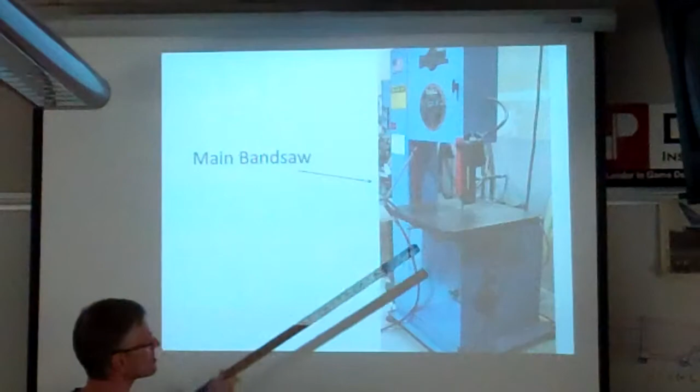So just like any of these saws, when you're lining up your work you want to make sure that your hands aren't in the way of that blade, right? They don't go into the big sharp blade. So you're always going... I mean, obviously, if there's the blade, you're not going to put your thumbs out there like that and get them chopped off or anything. You always make sure that you're 3 inches away from that blade when you're cutting. And you put what do they call it, a gate piece? A fence?

Okay, so some of the interesting parts you can see from here: here's the blade, here's the guard, which you're going to label on our test. Guys, look up back there, not time to talk right now.

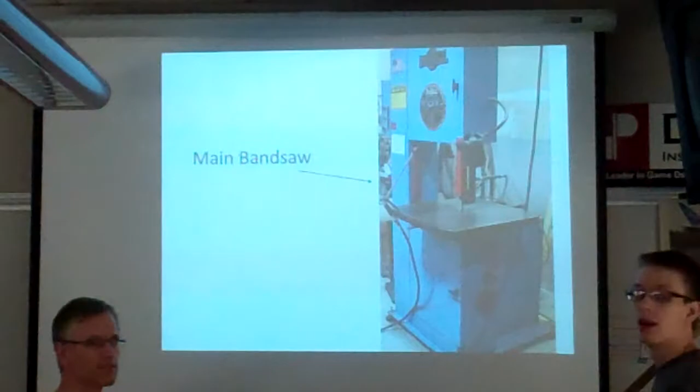So this is the blade. This up here, here's the guard. It is the guard that was originally mentioned in the general safety.

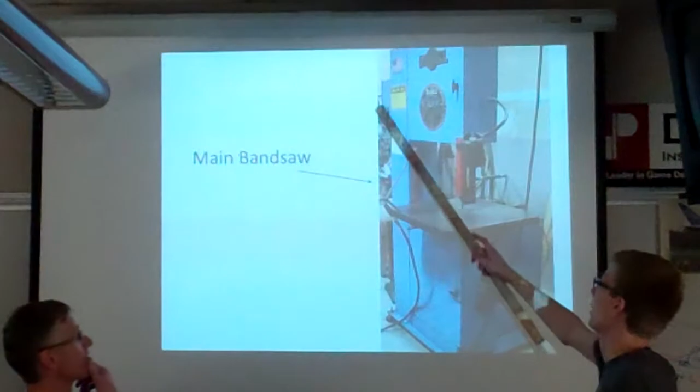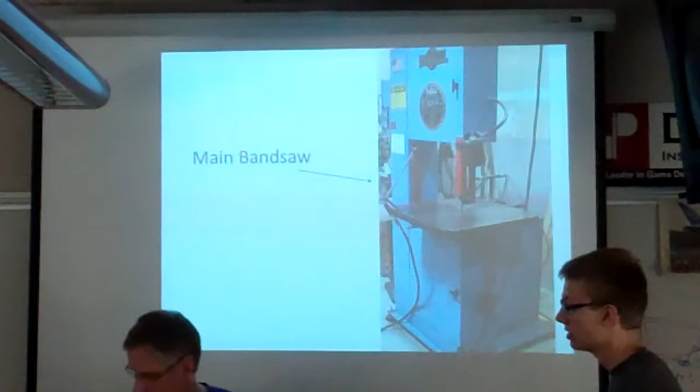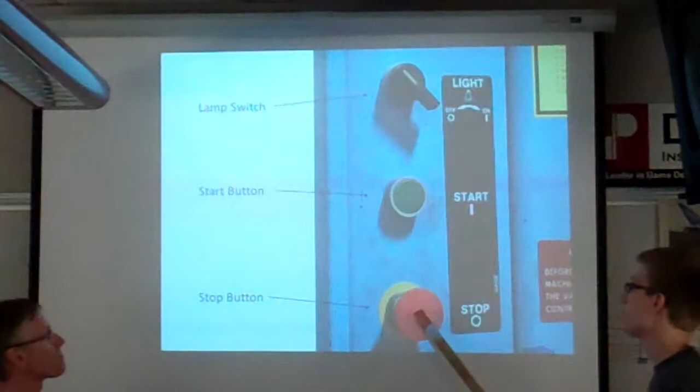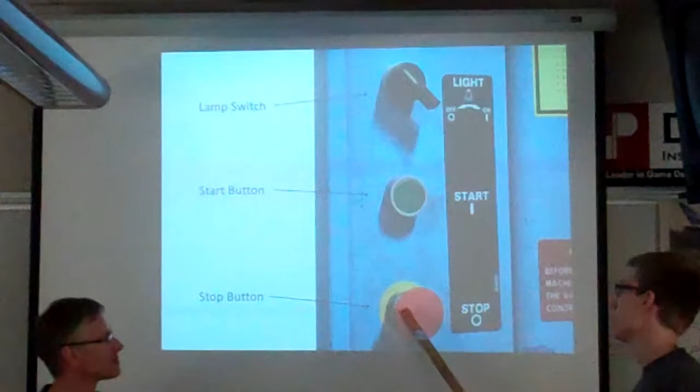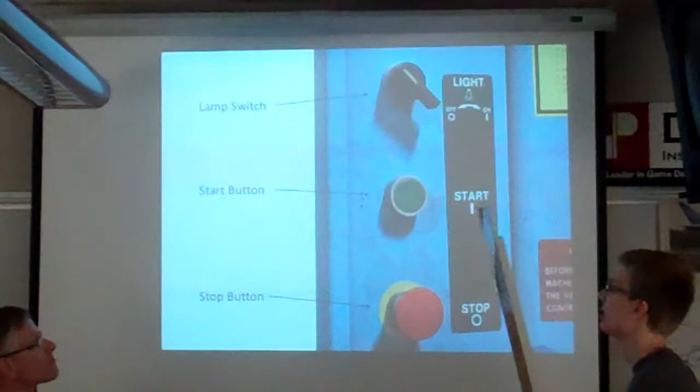So this is a zoom in on those buttons. Here's the stop button, here's the start button. This stop button is really easy to press. The start button is harder to press because it's recessed with a big metal ring around it to make it so it's harder to accidentally turn it on, because the repercussions of accidentally turning it on are significantly higher than the repercussions of accidentally turning it off. And this is a light.

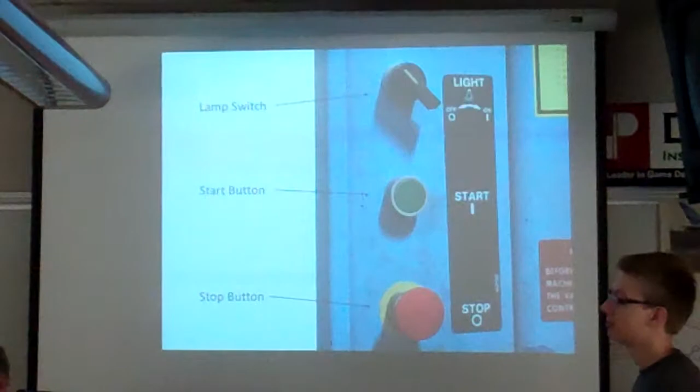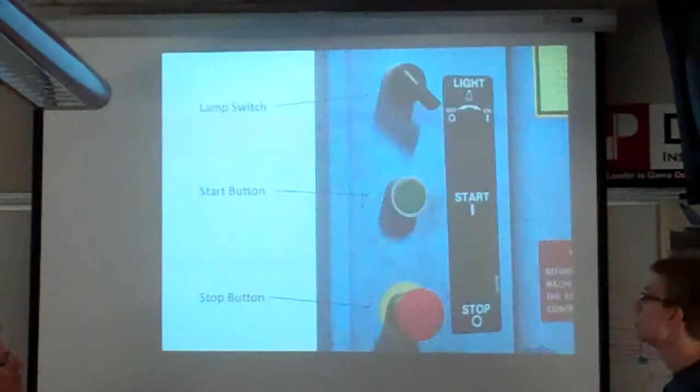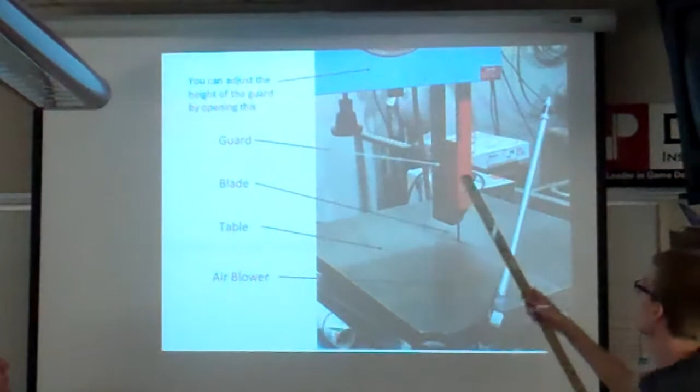Here's the air blower, here's the table, here's the blade - it's sharp. Here's the guard - it's not sharp. It guides the blade and helps it so it doesn't get all bent out and breakable.

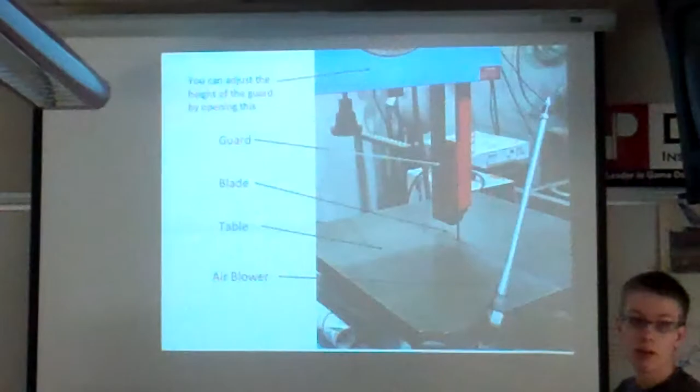What's the air blower for? Huh, what's the air blower for? It's to remove flecks of aluminum or other kinds of metal.

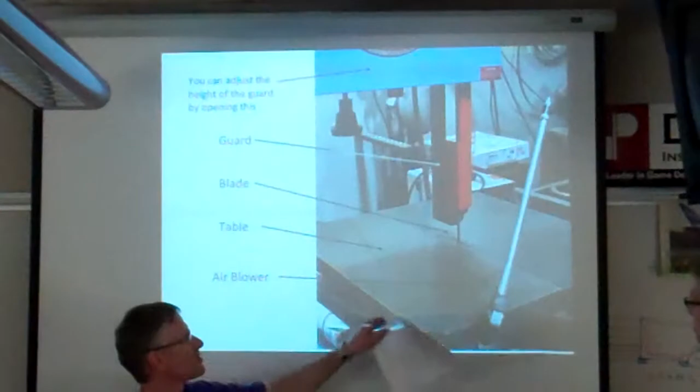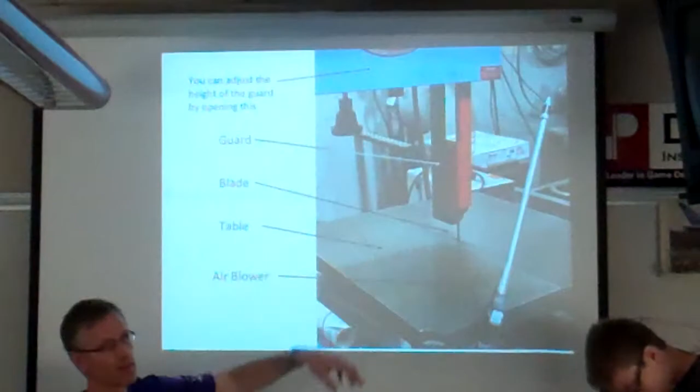Next. So what you can do is like the compressed air thing - it's just compressed air, usually shop air. What you do is after you get cut, there's bits of material all around the blade and stuff, so what you do is you can blow it back and away. And then what we do when we're done with the day is we go behind and sweep all the little bits and stuff that blow back there. It's just to kind of keep it clean, so you can see what you're doing when you come with your next piece of metal to cut.

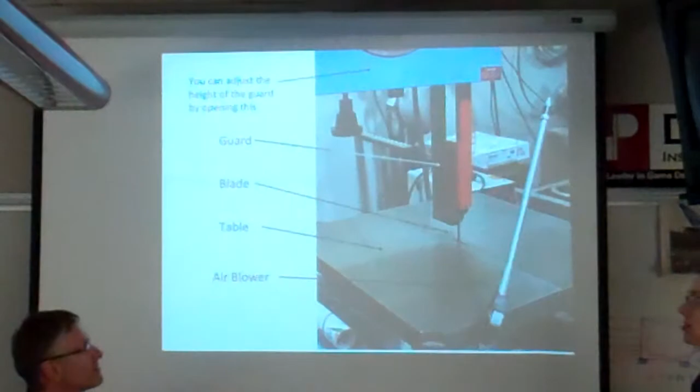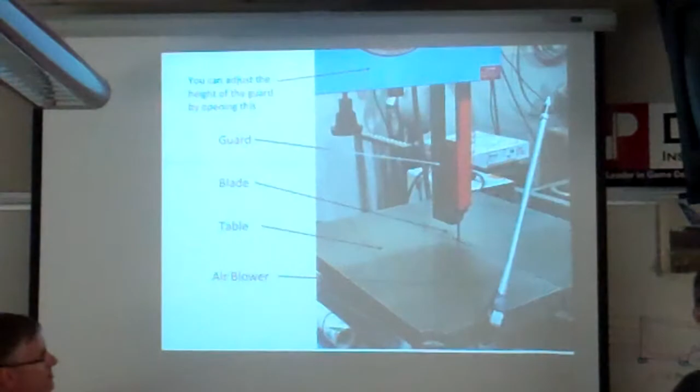Also, if all else fails, if you can't do it any other way and it's heating up too much, you can actually just continuously blow on the thing and cool it down. And if flecks are flying in your face, you can also have someone else blow it so it doesn't go in your face. Yeah, hit next.

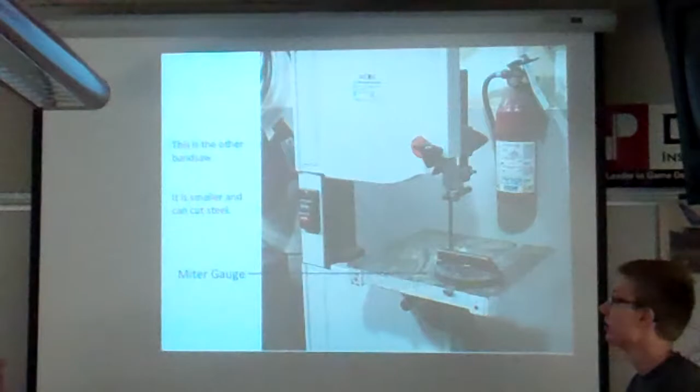Here's the other bandsaw we use. It is smaller, and it's made for cutting steel.

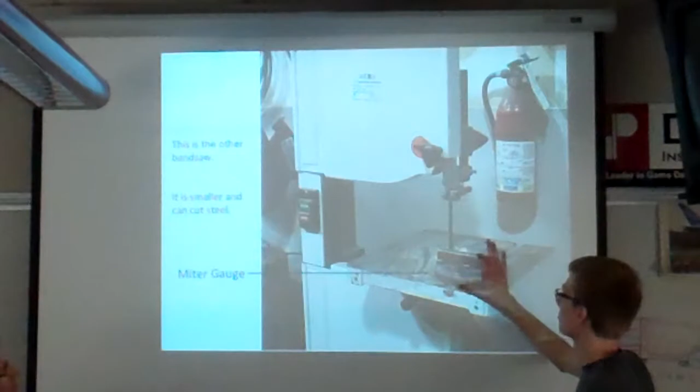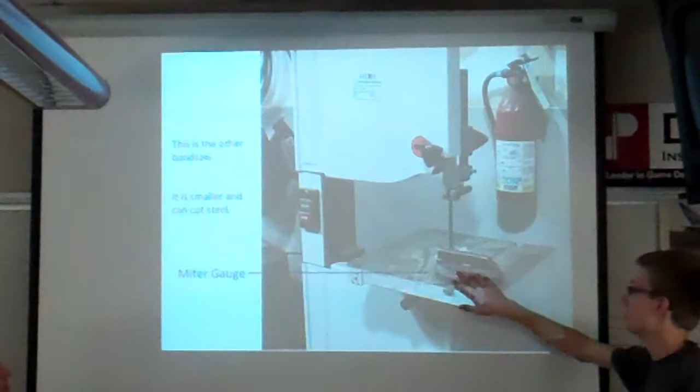This is a miter gauge. It basically allows you to cut at an angle. You put your metal in the miter gauge groove—it's like a little flat surface. You push your metal up against it, and you can twist this knob to adjust the angle, so you can have an angle on your cut.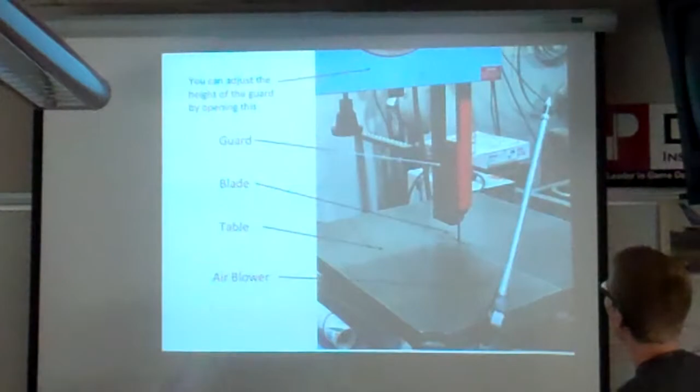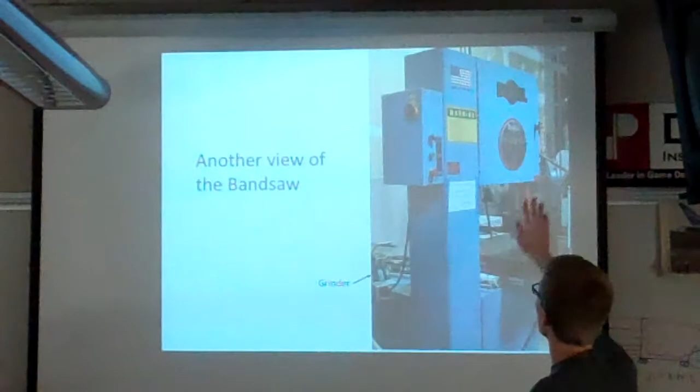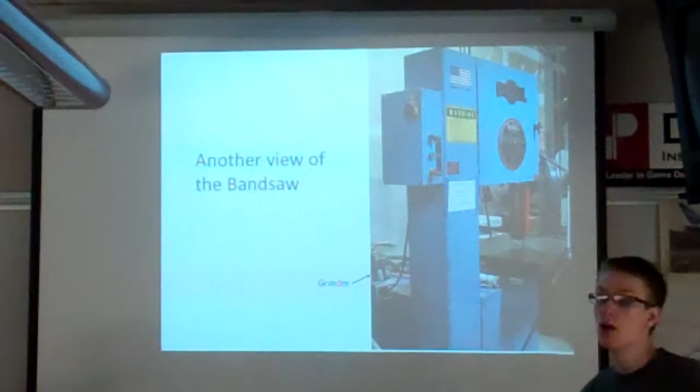Most of the time the guard's in a place that's good enough—it's normally pretty low. You want it about an inch over the metal, so if you're cutting a piece, you want it about an inch over. If it's an inch and a half, it's fine, just around an inch. Not like 6 inches, because that'd be ridiculous. It's probably pretty intuitive though.

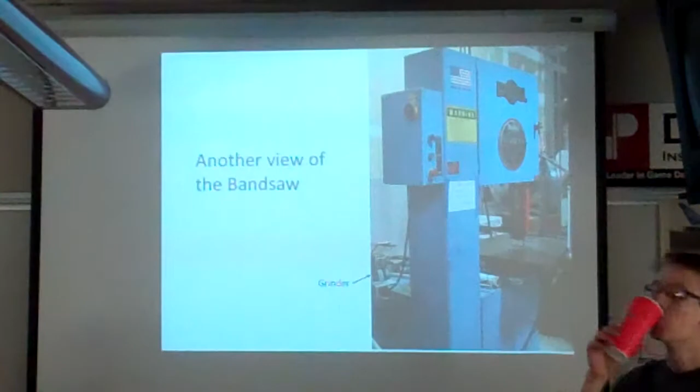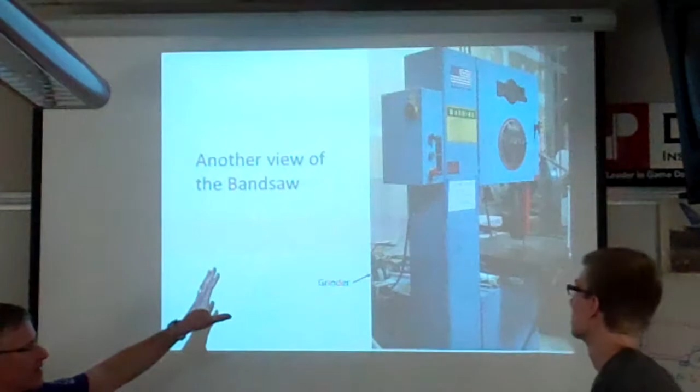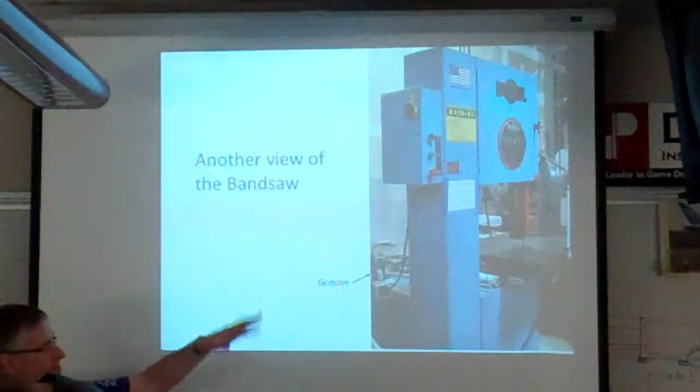Whenever you make any adjustments to the machinery, you always wait and make sure it's off, make sure nothing's spinning. That's true for anything—if you're going to grab something behind the blade, just make sure the blade is completely stopped. It does take a little while to stop because it's got so much momentum when it's spinning, since it's a big giant piece of steel. It's a huge temptation to just grab it, but just don't.

It's also hot for a few seconds after, and sharp. Hot and sharp are not a good combo, ever.

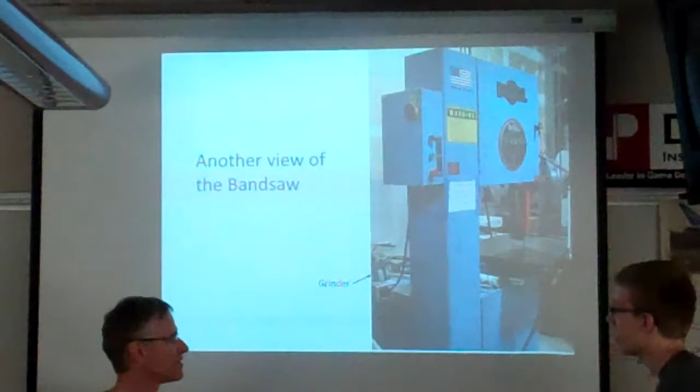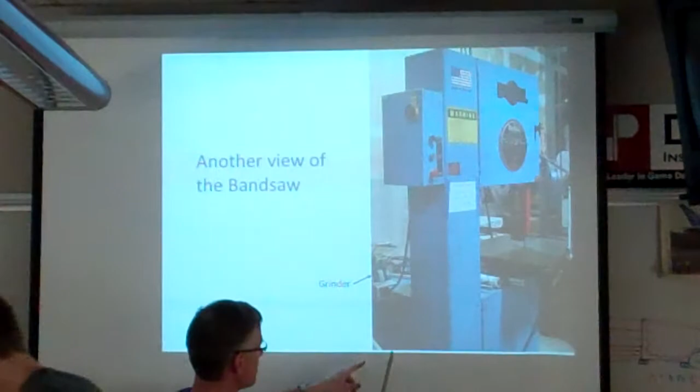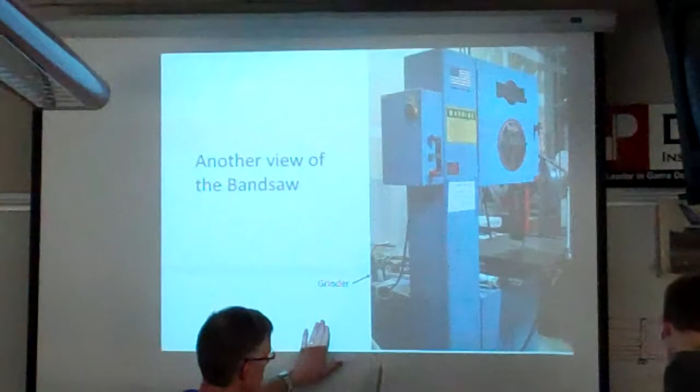Another thing you should probably do, if you've got a small piece of work and you want to cut off just a little bit off the end: you hold the work like this, and you use a push stick to move it along on the side closest to the blade. Because if it's less than 3 inches, it's going to be pretty small pushing it through on the right hand side. So use a push stick or another piece of metal to guide it along, so you don't risk your fingers—fingers are fun to have.

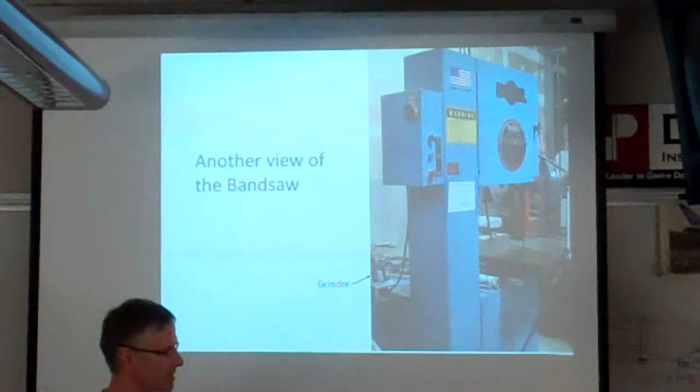If you can't find something to push it with, talk to a mentor—there are pieces of scrap wood around that are really good for that.

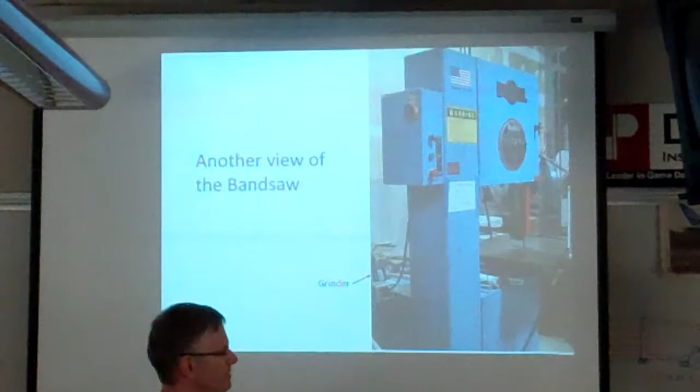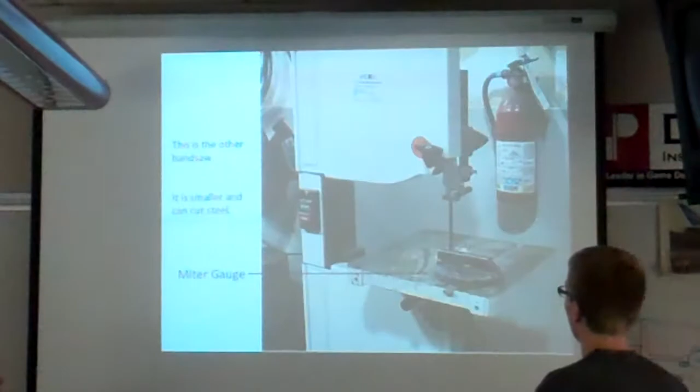What else we got? Go to the pro tips—it's after the steel page. Pro tips: you should watch your fingers.

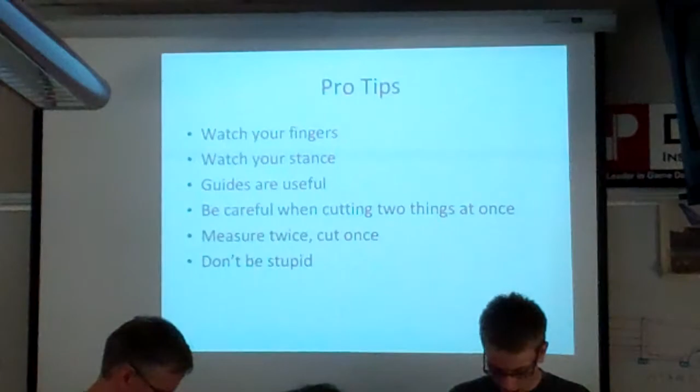Also watch your stance—I discovered this yesterday, I didn't get the same kind of training other people did. When you're milling, you don't want to lean on the piece, because when it goes through, you'll pitch forward into the blade. Tyler, your feet are actually supposed to be like this—one in front of the other, perpendicular, so you're purposely not going to be able to put your full weight there. This goes like this, and then you go like that, so your legs are solid and it's kind of impossible to just go forward.

So we'll get to some stance here. We didn't cover that one. The idea is you don't fall forward. Basically, make it so you don't fall forward and you can't fall forward.

Another thing to notice is having a fence. Actually I could probably do this with this and that big metal plate I can't find. Okay, so let's say this is your plate, your table. You hold the table 'cause that's heavy, and it's hard to do that.

So let's say I wanted to make a cut, and here's your blade here-ish. You could take your clamp and clamp this onto it, then run your piece along this thing to make sure it goes straight. Generally you want it the same distance from the edges, so it's a nice straight line that's perpendicular to the edges.

So that way, if you have a cut on a piece of wood that's completely parallel, you can use that technique for a really nice straight line. Otherwise, if you're just trying to follow a line with the bandsaw, it's really hard - it likes to jump around. Although if you're just eyeballing something, and it's completely unprecise, you don't need it. Normally there's a steel bar nearby the bandsaw for that purpose.

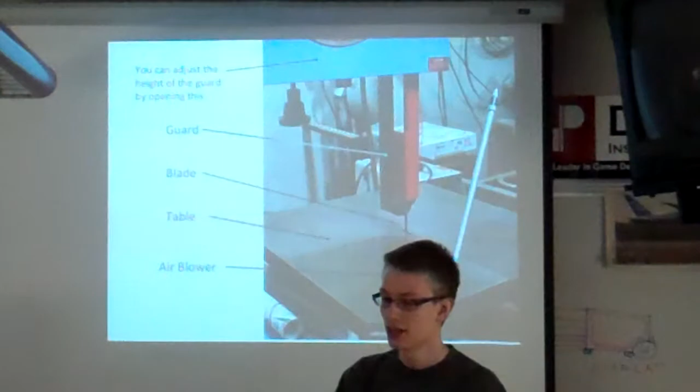If you're cutting a piece of metal and it gets really hot, you probably shouldn't use a rag to hold it, because the rag might catch the blade. That's what somebody was doing with the rag. Or you can just go a bit slower and let it cool down some. If it's getting really hot, that's bad.

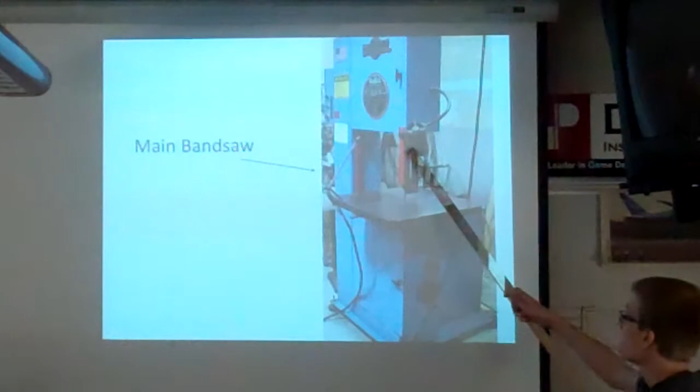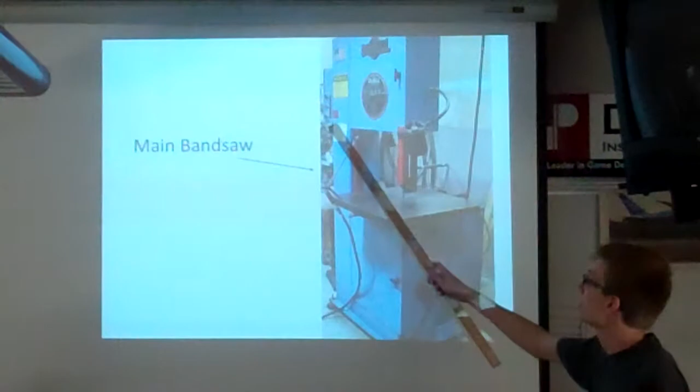Okay, what is this? Guard. What is that? Blade. What is this? Table. What's this one? Off, on, light, lamp. Is there anything else? Air blower, the belts inside. Belt cover.

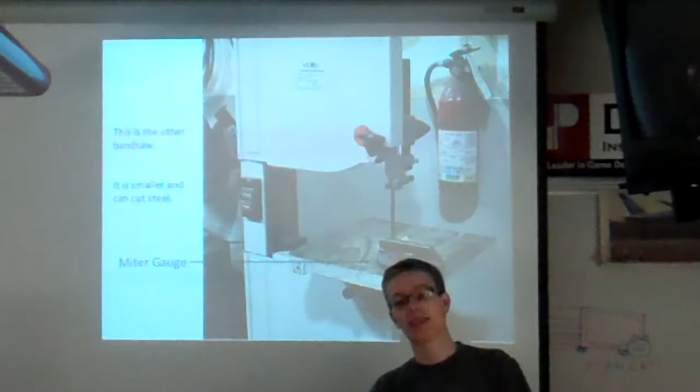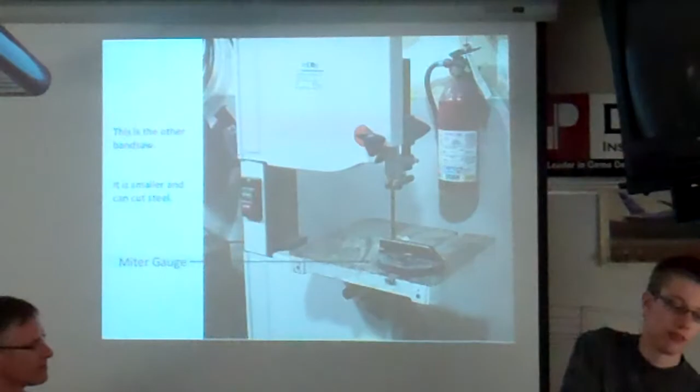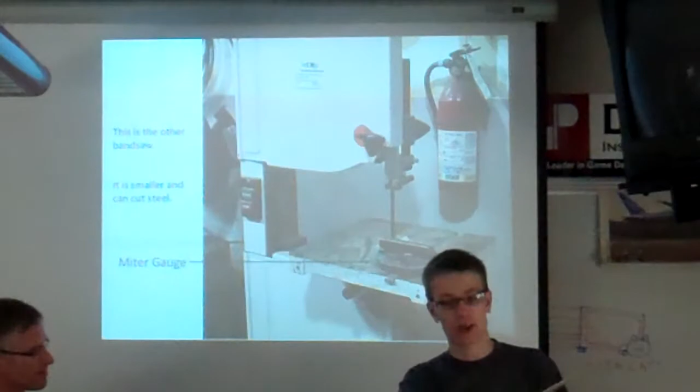Some of the bandsaws have a table that can tilt. When you're doing that, you want to tilt it to the max at 45 degrees, because if you go past 45 and try that angle, you could literally spin it around. If you needed a 60-degree angle, you could just rotate the whole piece 180 degrees and get the same thing. So 45 is the max - going over that, it's getting more and more prone to falling off, which is bad. So 45 degrees is the best number.

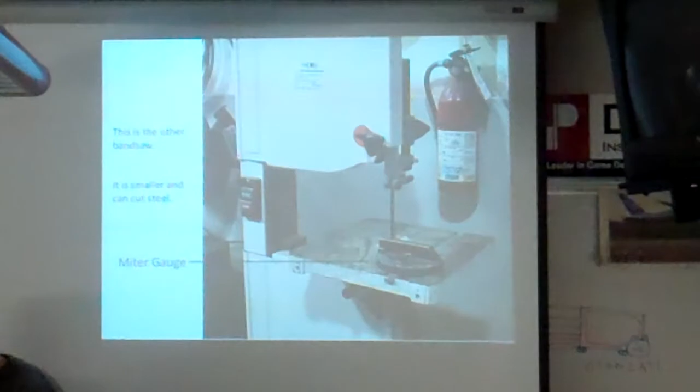Stock means metal. If you see the word stock, think metal.

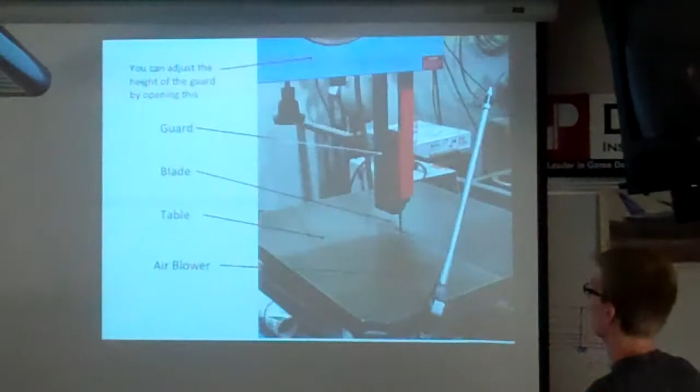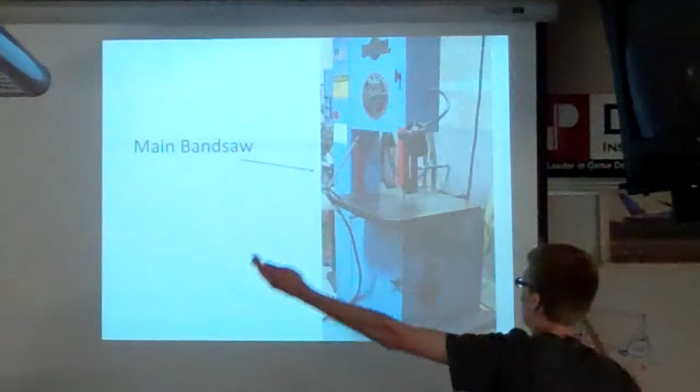Okay, so you know how the blade rotates like this? Okay, so if a blade were to break, who here is taking physics? I am. Do you guys know about centripetal force? Where things, when they're moving, want to continue going. Things always want to go straight, they don't like curving. This is spinning around really fast - if it breaks, it's going to want to go out. If you're standing to the right, and it breaks, it's going to go out into you.

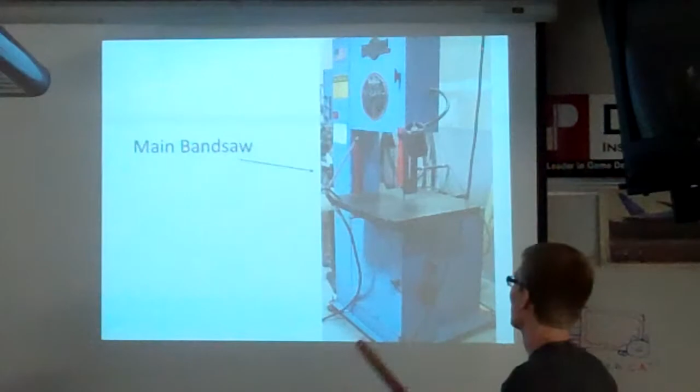Fast-moving, sharp things are scary. So what you want to do is stand on the left side, because then you'll be in this bubble of safety, since the blade is going away from you, which is good. So always stand to the left side.

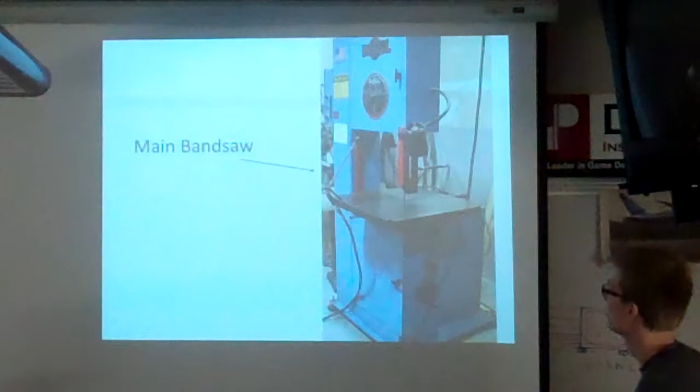Don't stand on the right, even if you're not using it, because you don't want to be the guy who stood too close and got their neck slit by flying metal. Don't become a statistic. That would be our first fatality. We haven't had any major injuries ever.

We haven't lost any fingers. The worst thing that's happened is someone got their finger drilled onto - that was me, but it was minor, not drilled into, just drilled onto. A screw jumped and cut it, pulled off some of the skin.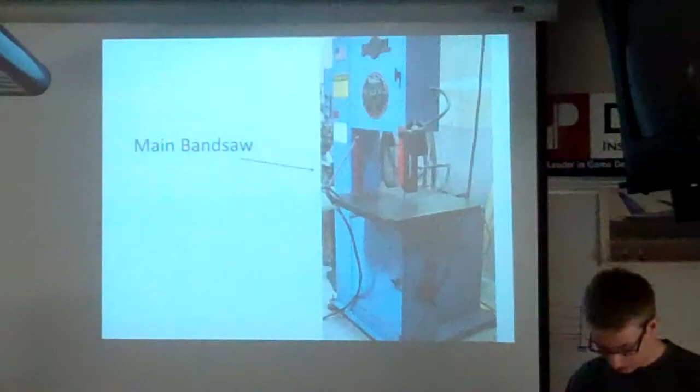We also had a fleck of aluminum go into someone's eye because they weren't wearing safety glasses. Did the eye come out? No. He was actually a mentor, and he learned to wear safety glasses from then on. Who was it? I'm not going to say.

Make your adjustments when it's not spinning.

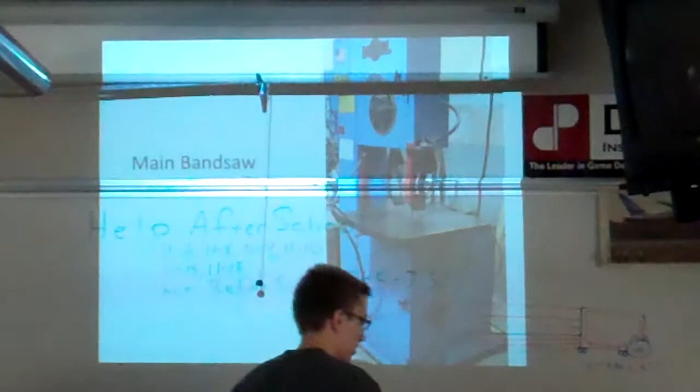Relief cuts: sometimes you want to make a nice curve on the metal. Say you have your square of metal and you want to make a curve like this. The bandsaw does not like curves.

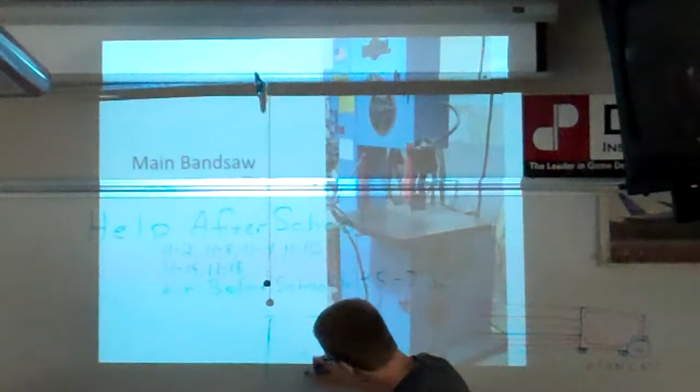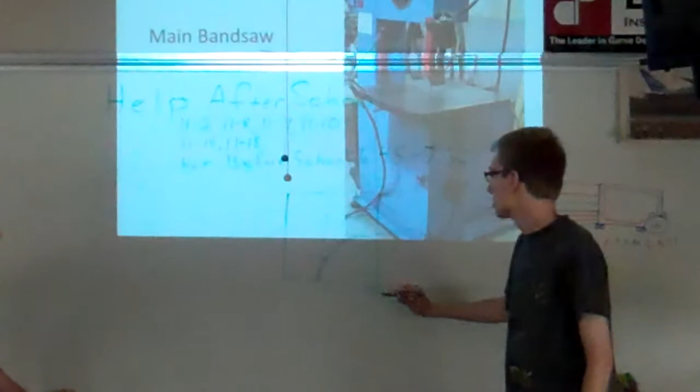So the way you'd do it is you'd cut like this, and like this, and like this. Those are called relief cuts, to relieve the pressure on the blade, so the blade doesn't break and you don't get killed - because you're standing on the right side.

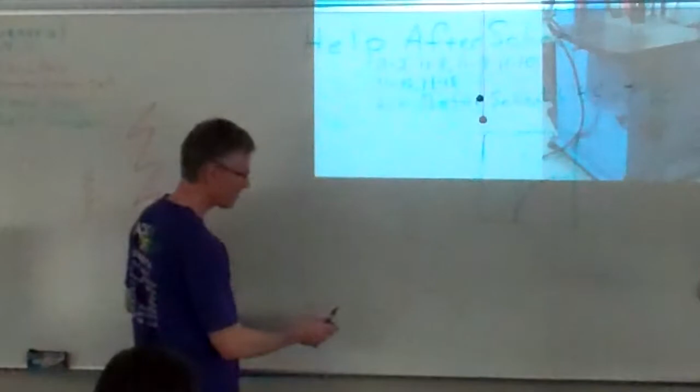Here's another kind of inside relief cut you can make. Say you need to get a shape like this out of this material - you have an inside cut like this.

You could cut along for a while with a bandsaw, but at some point you won't be able to just keep going forward on the curve. So what you need to do is back up the blade, come at it again, back it up, and come at it again - a series of cuts.

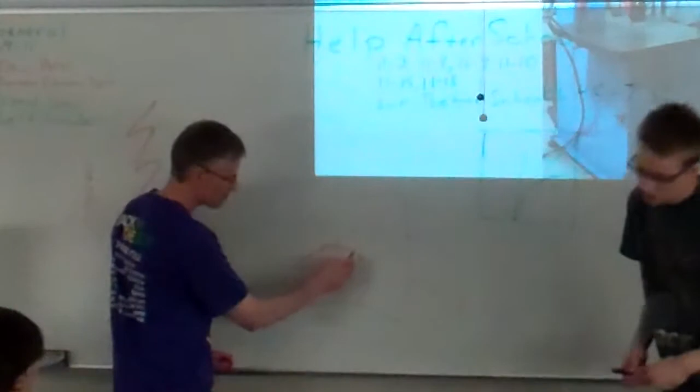Then you come back after that and clean it up. You get the big chunk out by making a series of cuts where you back up and go forward. It makes it jaggedy, but it's easier that way because the bandsaw blade is about that thick.

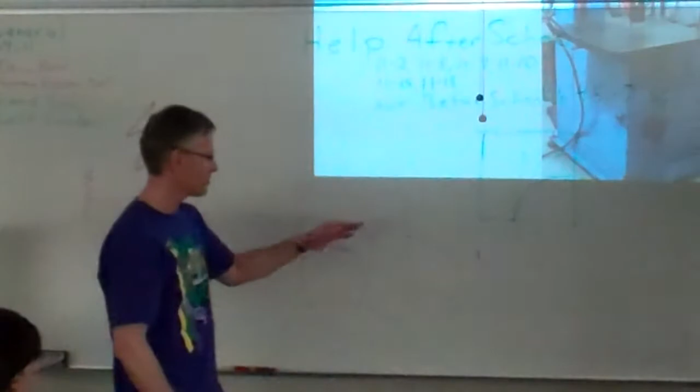It's pretty thick, a pretty wide piece of metal. That's why you can't just turn it on a dime like a jigsaw - you have to sit there and work it across as you go.

So those are what relief cuts are. Generally when you're doing this kind of work, you need to take it nice and slow.

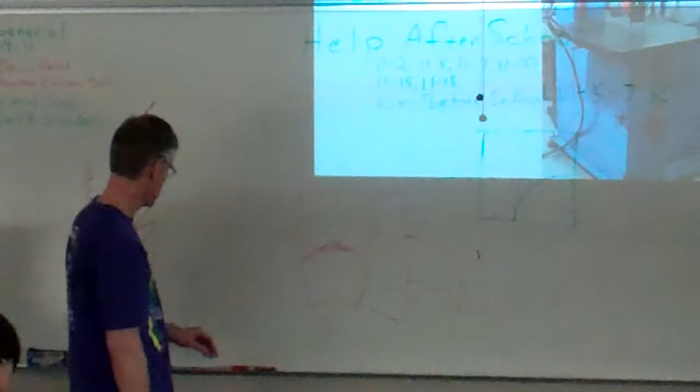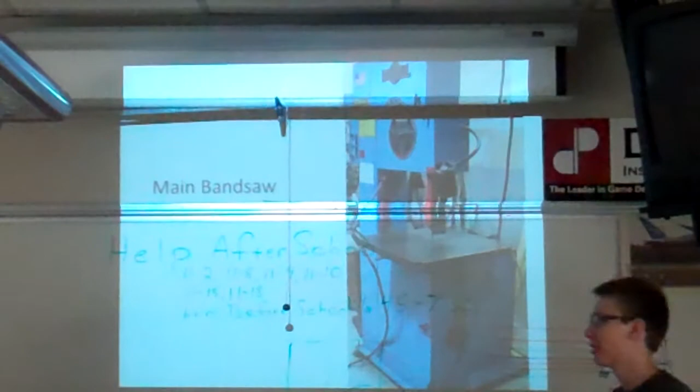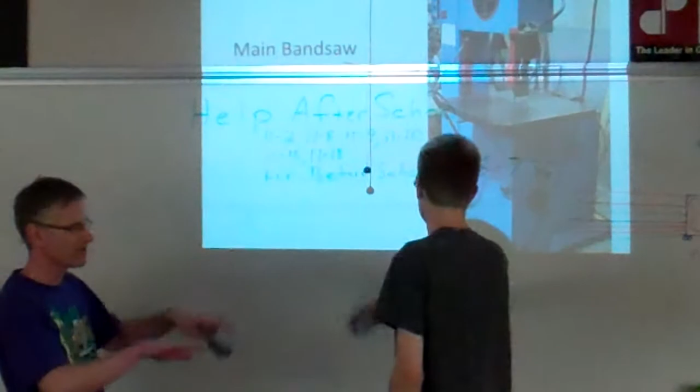Okay, so what else did we talk about? We talked about a bunch of stuff. We talked about the table - it can only rotate 45 degrees on the little one. And we talked a lot about the blade.

Now it's spinny, scary. Keep your fingers 3 inches away from it - 3 is generally a good rule of thumb for inches away from cutting things. 3 is the magic number.

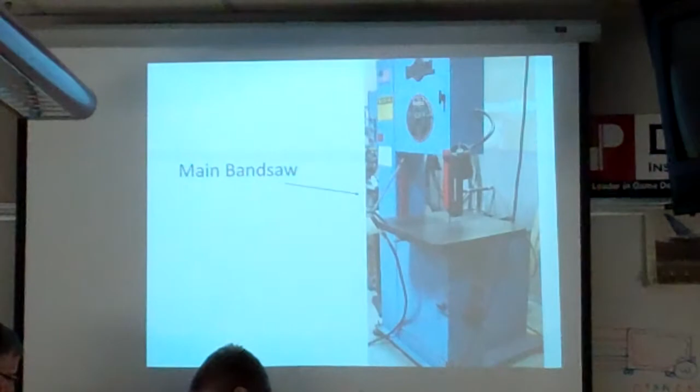Okay, so let's do a quick review on the parts, and then we will progress to the test. We're almost done, guys. We finish this test, and then we do one more, and we're done.